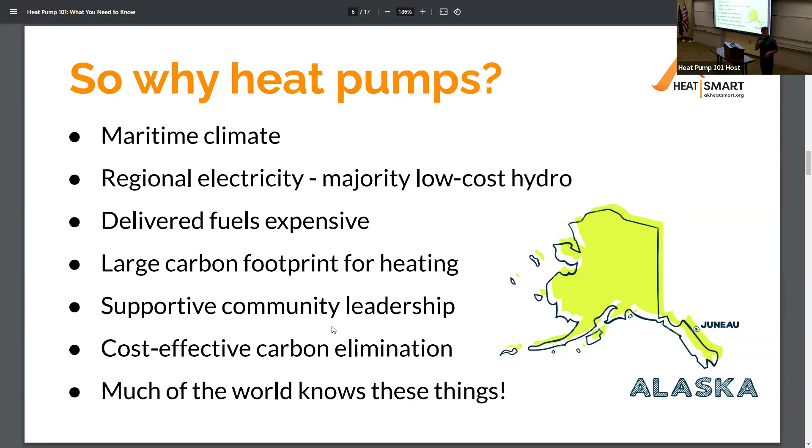And so I was over there and I took all these pictures and I thought, I need to send these to the State Historical Preservation Office because this is crazy. These buildings are so old and they're covered with heat pumps. But anyhow, so we're playing catch up. And in a natural gas place like the rail belt, kind of exciting to see that in 2022, heat pump sales outpaced gas furnace sales for the first time.

And I don't have any details for this year or last year, but I think the trend has increased even more, and the shift is happening as gas prices increase, heat pumps become more attractive. Who knows what's going to happen out there in Cook Inlet? I don't have a crystal ball, but we've all heard predictions and forecasts. None of them are all that encouraging in terms of prices, and so that balance could shift even more towards something like a heat pump over gas, for all the gas burners in this area.

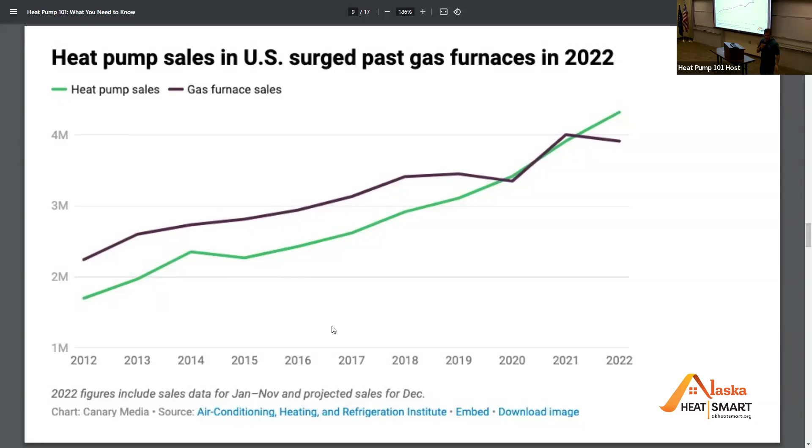So again, why heat pumps? Just a few things about heat pumps and how they work and what they do. They don't make heat like burning something, burning oil, burning gas. You're making heat from something else. A heat pump just moves the heat. And it's a beautiful thing. So if you had a heat pump hanging off the wall out here and the air handler here inside, you're pulling thermal energy from outside the wall.

You're not pulling it from the burning of oil, which traveled to Homer on a barge, which came from a refinery in the Pacific Northwest, which maybe was sourced by a tanker from Valdez after the oil flowed down the pipeline from the North Slope, basically a 3,000-mile journey to get your heat to your living room instead of just pulling it from the other side of the wall. So oil burning, gas burning, at best, 75, 80, 85% efficient. A lot of the resources going to waste heat up the stack, to noise, emissions.

A heat pump can be up to 300% efficient because it's just moving heat. It's taking heat from outside, moving it inside. So it's really low cost, low energy required to move the heat as opposed to making the heat. Depending upon your existing fuel source for your home, you can save anywhere from say 25 to 75%. I'm changing those numbers right now.

I have a heat pump in my house. I was burning oil. I'm saving 75% off my heating bills. I'm saving $1,500 a year. It costs me $500 a year to heat my house. 1,550 square feet, 2 stories, one small heat pump that costs $6,000. So it paid for itself in 4 years, and now it's just all gravy. For many, it's clean. Obviously, it's clean in the sense that, well, if you're 100% hydro, it's really clean.

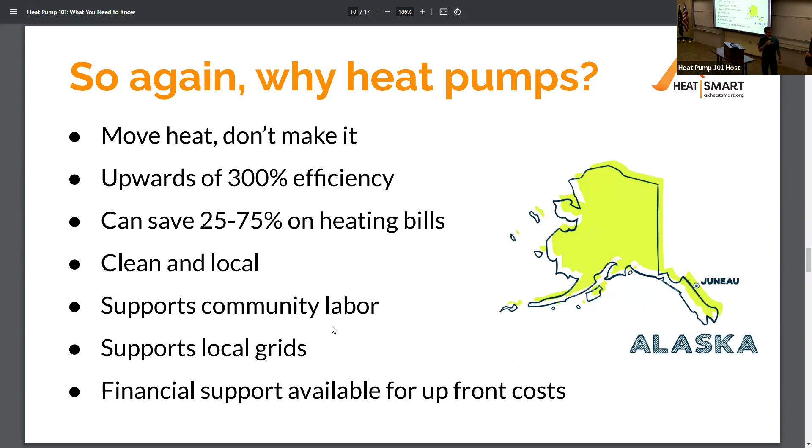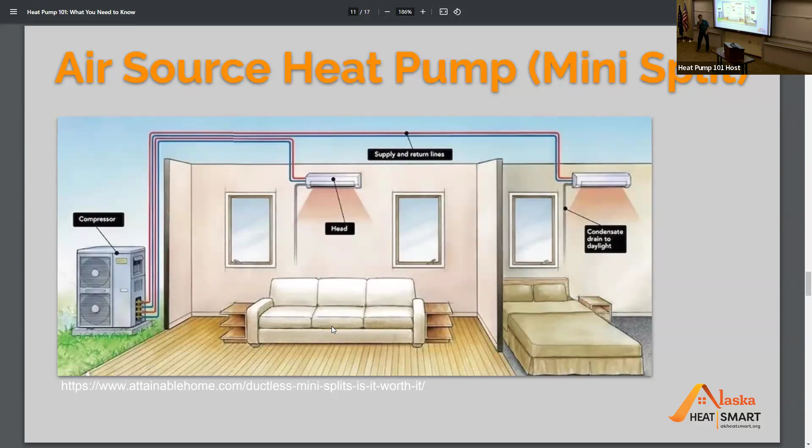I don't know about here, but in a lot of Southeast where you have furnaces, not natural gas, but a diesel furnace, you'll have ducting throughout the home. I assume there's a lot of natural gas furnaces. I think there are up in Anchorage and whatnot. So you've got this existing ductwork in your house, and you can actually have a heat pump tie into that and have a whole home solution where your heat's being pumped throughout the home. So it meets all your code requirements, warms all your rooms.

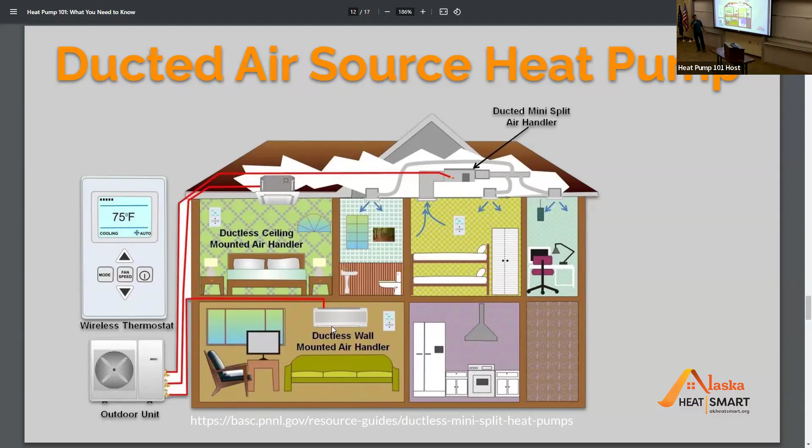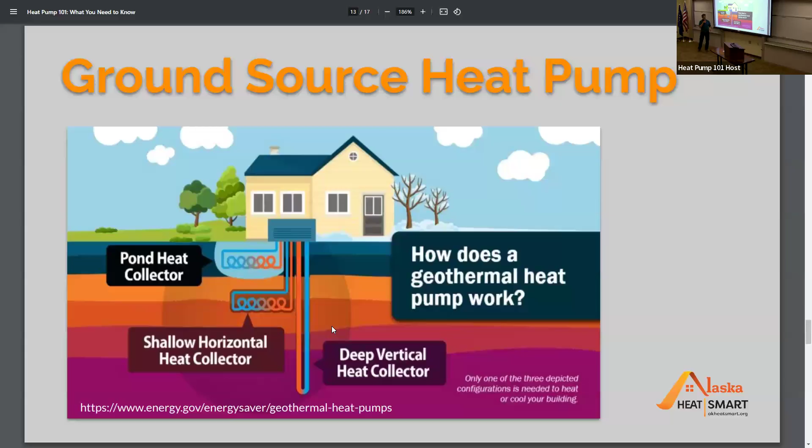And then you can also have a field sort of up in a flatter area, like under an airport parking lot or in your yard. If you have a big yard, you can have them just a certain distance under. So obviously it's very invasive. It's a big project, big process, but these things are not subject to changing air temperatures. The ground temperature tends to be fairly steady, and you can pull heat out all year at a very regular rate. But they tend to be more expensive up front.

And so these are the questions we get all the time. These are the important questions. Is it going to work for me? What do I need? What is going to work for me? And how much is it going to cost me? And how much is it going to save me? And that's a lot of what Alaska Heat Smart does, is trying to answer those questions for you. We tend to not charge any money for that process. We tend to just give you the information. If you give us your utility info, we can give you that information.

Ray, we're going to give you a free heat pump if you stop burning oil. You said yes.

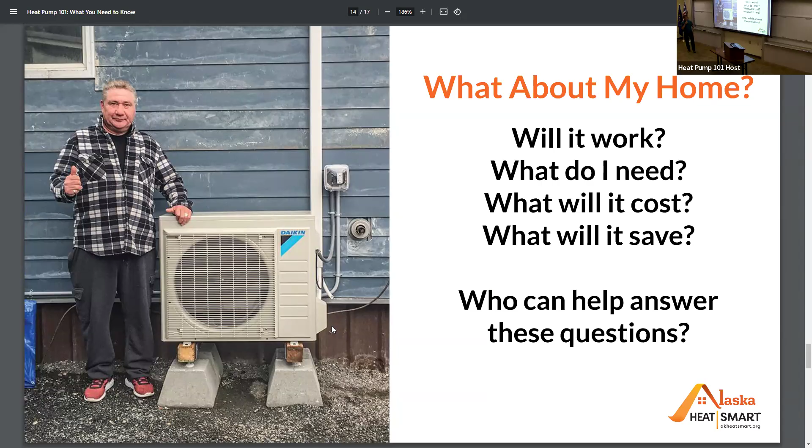I don't know if we need this slide. This is what you may feel like when you go to three different contractors and ask what you need. One says this, another says that, another says something else, and they all give you different prices, different layouts and scenarios, and you think, oh my gosh, forget it. Gas is working just fine, or oil is working just fine.

I can't do this. And that's a lot of why Alaska Heat Smart was formed, and why we have our home energy assessment program, to get rid of the confusion and give you solid answers that say, yes, this is what's going to work for your home.

Now instead of calling a contractor and saying, I keep hearing about heat pumps, what do I need, what do I need to do, you can call the contractor and say, hey Andy, I had this assessment. I understand I need an 18K BTU Mitsubishi hyperheat unit. The outdoor unit can go here, the indoor unit can go here. Sounds like my panel's good, I've got enough power, enough capacity for a 20 amp breaker. I'm good to go. What are you going to charge me?

So this puts the homeowner in the driver's seat, gives you a lot of power and control and information, which is power and control.

I didn't get specific on this page, but all this information is here in this room, so we can share that at some point.

I think I'll hand it over to someone at this point. I'm not sure who. Yeah, I'll hand it to Satchel because she's right here.

The installers will be able to answer this: the $500 that goes to the installer, do the installers credit that? Like, do you give $500 off the installation?

Didn't mean to put you on the spot. Just -- no, not working. Can we go back one slide? No, I guess not. Maybe go forward one slide. Yeah, okay.

So in addition to the $500 HEA rebate, our latest program at Alaska Heat Smart is courtesy of the Environmental Protection Agency's Climate Pollution Reduction Grant Program, which in September gave 25 awards nationally out of 300 applicants, and Alaska Heat Smart was the only one in the state that got one. And it's a big one -- we got $39 million for incentivizing heat pumps between Kodiak and Ketchikan.

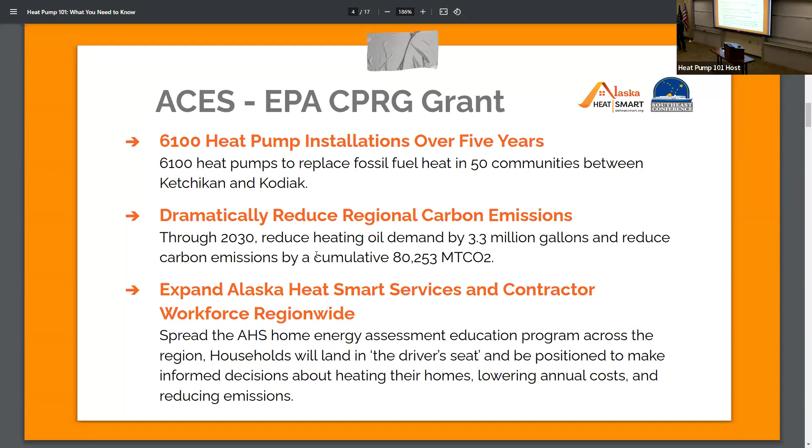We're looking at 50 communities, 5 years, 6,100 heat pumps, combined with a home energy assessment which helps you understand what you need, and then based upon income, pretty generous incentives. Let's jump ahead to the next slide -- pretty generous incentives, as currently written and hopefully to be finalized, for everybody.

The lowest income level, 80% area median income and down, can get up to $8,500. The next level above that, $6,000. And then, amazingly enough, as currently written, anybody can get a $4,000 credit, no income requirements. It sounds pretty ludicrous, but they've done this in the state of Maine, and it's been incredibly successful.

For Homer specifically, the numbers are here -- it's a pretty ambitious program concerning what's been done to date. It may sound a little crazy; it's based on Juneau numbers, because in Juneau roughly 5 years ago we had maybe 100 installations that year, and now we're up to 500 a year. It's really accelerated as understanding has grown, education has taken place, and programs not quite this generous but fairly generous have made it easier for people to pay for these things. So roughly 570 heat pump incentives for Homer alone, roughly 700 for this area -- for Anchor Point, Kachemak, Soldotna, down to Homer and Seward.